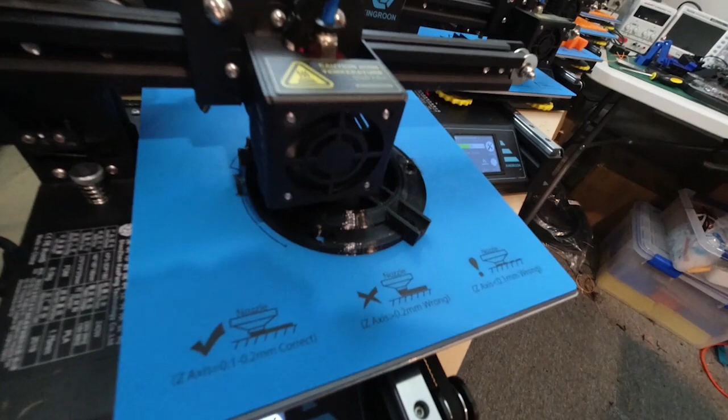Welcome to part 2 of how to start 3D printing. In part 1, we gave an introduction for people unfamiliar with 3D printing and how it works. We also covered the software side: how to download free CAD software, design a simple part, download slicer software like Cura, and generate a G-code file for the printer.

Today we're going to take that file and actually print the part we created. Then we'll look at some different printers out there and current prices, because another goal of this video is to show you that for less than $300 you can buy everything you need to get started with 3D printing.

The printers we'll be looking at range from $150 to $200, and filament runs about $15 to $20 a roll. You can pick a color. You'd be starting out with PLA. So once you've got your printer and filament, you're pretty much ready to go. Just download the software and figure out how to use it. There are a lot of tutorials on YouTube that'll help you with that.

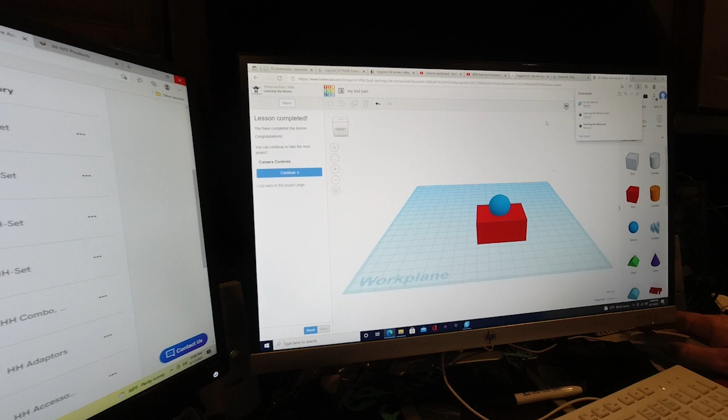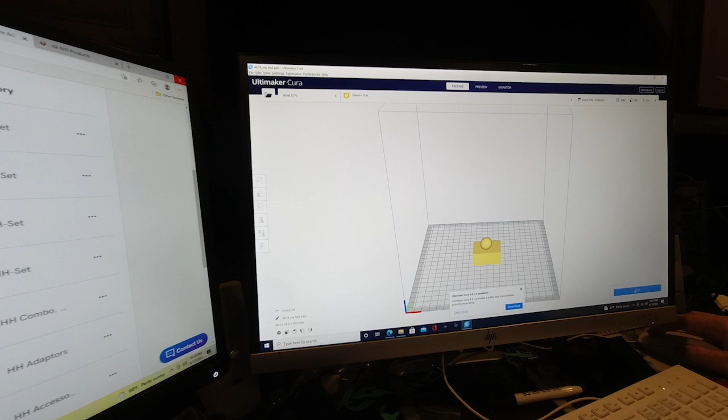So let's get going. To recap, in part 1 we created a square block with a round ball sitting on top of it. This was done by downloading a product called Tinkercad and using it to create a 3D drawing. Then we saved that drawing on our computer. Next, we loaded a software product called Cura, which sliced our 3D file and generated a G-code file that the printer will use to print the part.

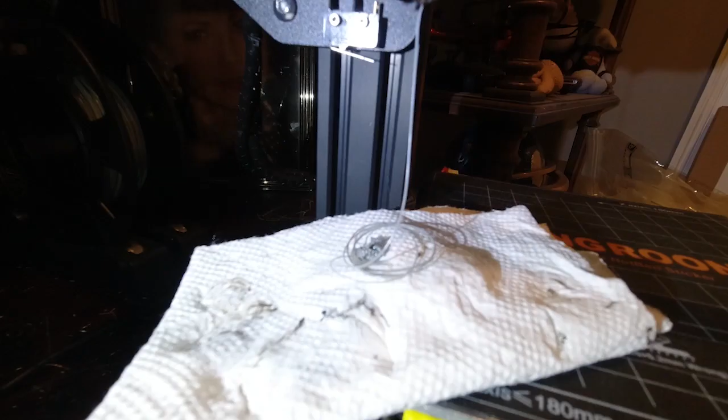We took the G-code file, copied it to a micro SD card, and plugged that into our printer. Now we're ready to start printing. We're loading some gray filament and running a bit through the extruder to clean out some old black filament we were running before. Now let's go ahead and start printing.

As you can see, it's printing a band around the bottom of our part. This is called brim, and it's printing because we didn't change the default settings on our slicer, which was set up for that. Now the printer is starting to print the actual part we created, the square with the round ball on top. So we're going to sit back and watch this thing print.

Now if you notice, our round ball is white instead of gray. This is because we paused the printer between printing the block and the ball and changed our filament to white. This is a little thing you can do.

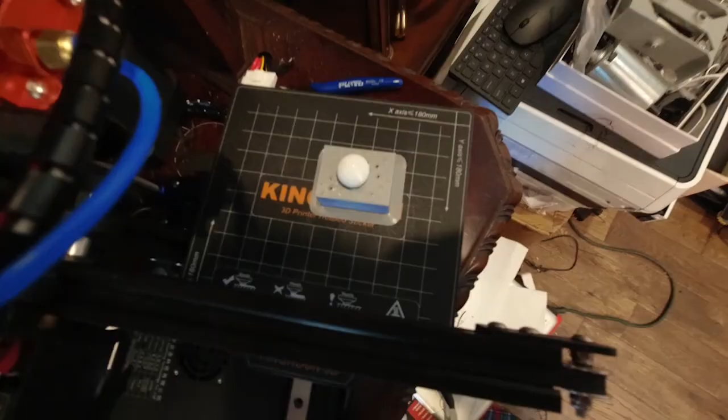As you can see, this is located kind of off-center on this build plate. That's because it thinks it's an ET4, and the build plate would be much larger here. This would be the center of that, but no big problem. So we take the part off and take a look at it.

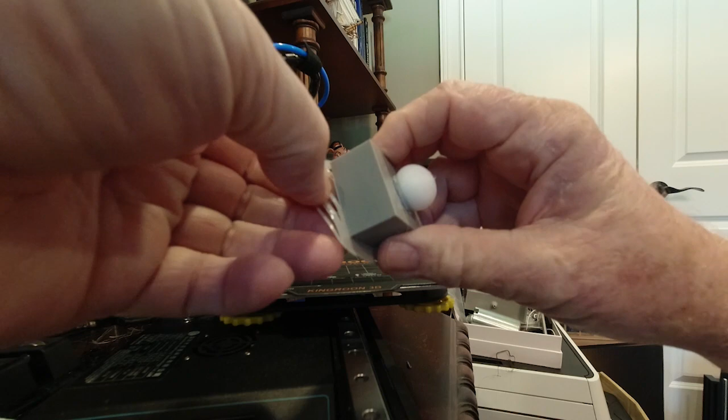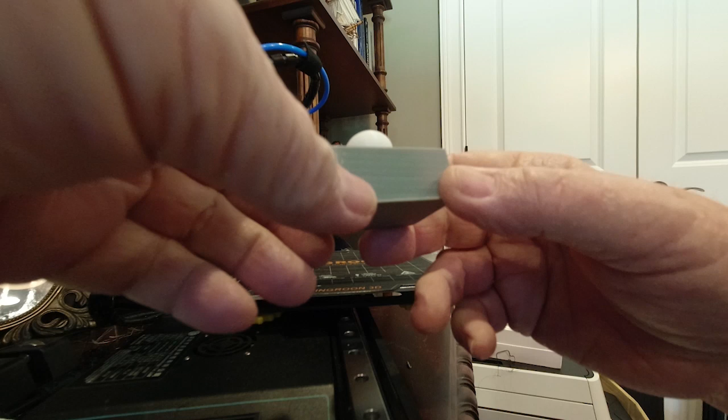We have some brim around here, and this stuff just pretty much peels off. Then you have your block. There's some distortion on the top. This is because, without going in and setting things exactly, I had a small infill with large openings at the top. I'd also been printing PETG with this printer, and I believe the nozzle has some buildup causing the filament stream to be thinner than normal, so it didn't fully fill in these little holes. But basically it made the part we designed in Tinkercad.

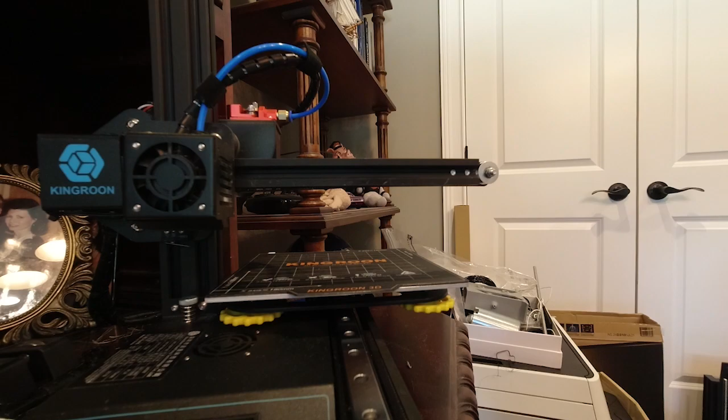Okay, let's check out eBay for some printers. 3D printers — we're going to sort by price plus shipping, lowest first, new printers, and buy-it-now price.

So let's take a look here. It looks like we have some under $100. These are simple little printers — I don't care too much for them. You know, they market them for kids, but I don't know that they're any safer than any other printer for kids, because they still extrude hot filament.

Now, here's something that caught my eye. If you think you're going to do some resin printing, this is a real good price on these Anycubic resin printers, the Photon Zero — for $109, that's not a bad deal. Here's the Creality Ender 3 printer for $143.99, free shipping. Let's take a little closer look at it.

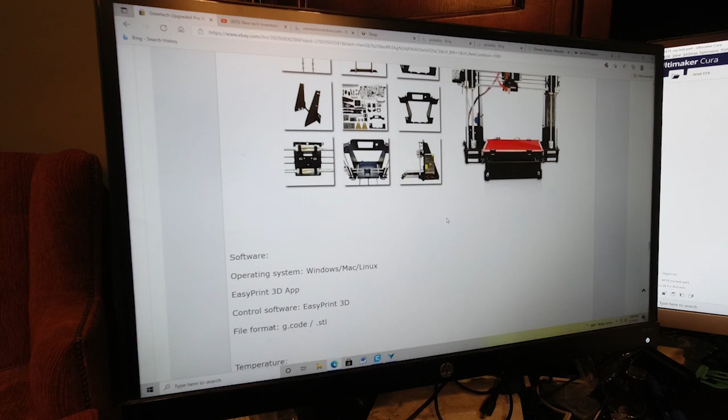Here we go, Anet ET4X printer. A printer I know quite a bit about, I've got several of these. $157, let's look at it a little closer. If you look at this one, you see there are very few parts to it compared to the acrylic printers, but still the ET4X has several pieces that have to be assembled. The ET4 and the ET4 Pro come with almost everything pre-assembled, 95% assembled. This one I would consider about 80 to 85% assembled, but it is metal frame.

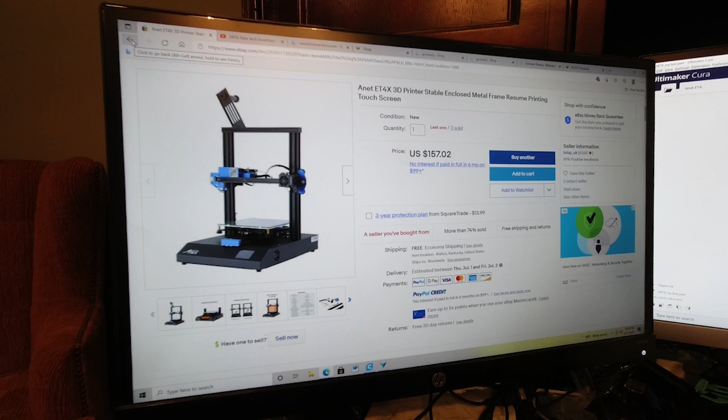It's a good printer. You can watch a lot of videos that I have where I've been running these things. Got a bunch of them down at the new print farm. And $157. Now we've got the Kingroon

KP3S. This is similar to the Kingroon printers that I've been using, and it comes pretty much assembled. Yeah, this is basically how it comes. You just put this piece on, hook up the power supply, a few easy steps, and it's ready to go. So very easy installation on the Kingroon.

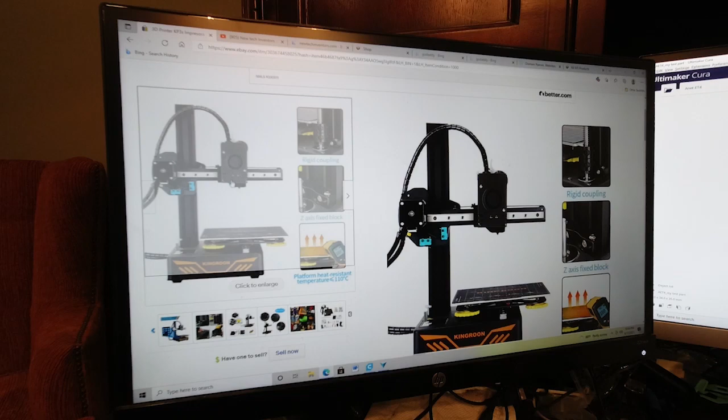It is a smaller printer. It prints 180 by 180 instead of the standard 220 by 220. But 180 by 180 works well for me on a lot of things, especially prototyping. Takes up a very small space, as you can see.

For $168, KP3S, I haven't purchased one of these yet, so I don't know exactly what improvements they've made. The regular KP3S had resume print, filament out sensor, 24-volt power supply, heated bed, can handle ABS, just about anything, removable magnetic build sheet that's easy for removing parts and everything. So it's a good printer.

Here we go, here's our Monoprice Mini Delta. I believe I did a video that included this, or maybe a couple of them. But the Monoprice Mini Delta, if you want a Delta printer, they print fast. They are the simplest things. This thing comes out of the box and you're printing in 10 minutes. You basically just plug it up and go. It's all ready to go.

It's real easy to print. You don't have to level the bed, you don't have to do anything. It does everything automatically. I love these Delta printers. I love to watch them print. They're like little inverted spiders in there, just working like crazy, building a web. So $180, that's a fair price for the Mini Deltas.

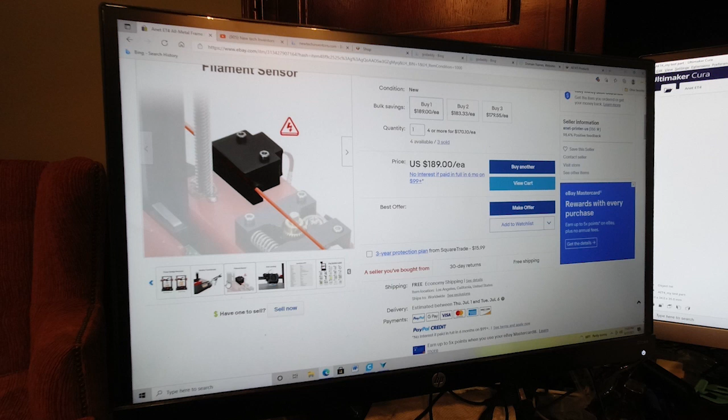Is if you go to the installation, all that you have to do is, this upright is already assembled, your motors are all intact, you put it together, very simple, with about 4 screws, then you come up and you put the drive belt on. You can assemble this printer in about 15 minutes. It's very fast. I think I assembled some of them on some videos because we have several of them down at the print farm. Anyway, it's a 220 by 220.

Okay, here we come to another Anet printer, the Anet A8 Plus for $199, $200. It's a 300 by 300 by 350 millimeters. So this is a larger, much larger build area on this printer, as you can see. I will say one thing about it, the assembly on this thing is like some of the others.

You have to do a lot of assembly. This takes a few hours for somebody that knows what they're doing. You pretty much assemble it from scratch. Once you're finished, for the price, you have a pretty good quality printer printing a large format, 300 by 300 millimeters.

The Anet A8 Plus for $200. Here's the Tronxy XY-2 Pro. I have these at the print farm also. This is a 255 by 255 build plate, so it's larger than your standard printers like the Anet ET4s and the Creality Ender 3s and so forth. So for $200, can't go wrong there. You can see a lot of those running at my print farm also.

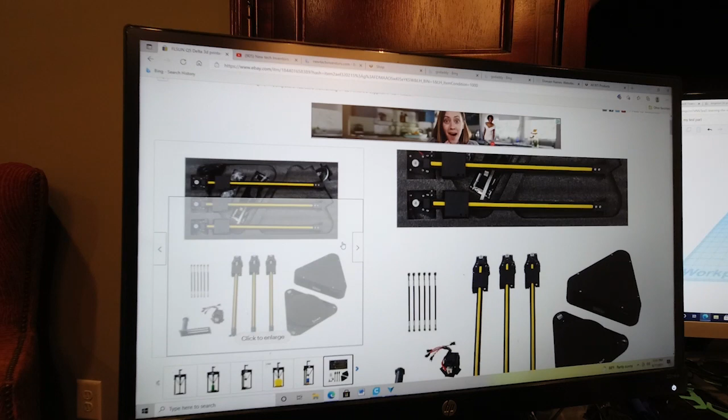The assembly, there is a little bit of assembly involved with this, but very little. Just attaching the arms, top and bottom plate, and that's about it. So it's a very simple and quick assembly. And if you go down and look at the specs on it, it pretty much does automatic leveling. It's a 200 millimeter circular build plate and 200 millimeters tall.

So it's a pretty good size for a Delta printer. And again, this is basically the assembly. You take the base, put these 3 posts on it, put the top on, and add these arms. And then you're in business. Put your filament holder up here on top.

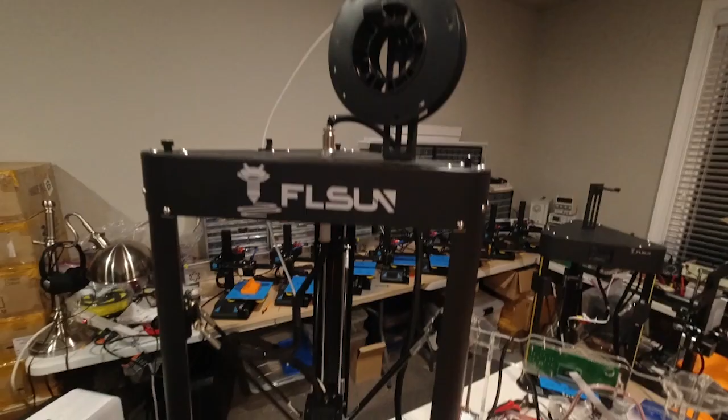Like I said, these things are really neat to watch. I don't know if I have any raw video of them or not. I may have to go upstairs and print something on one of them and videotape it so you can see how they operate. Here we have the FLSun Delta printer, and we're currently loading the filament.

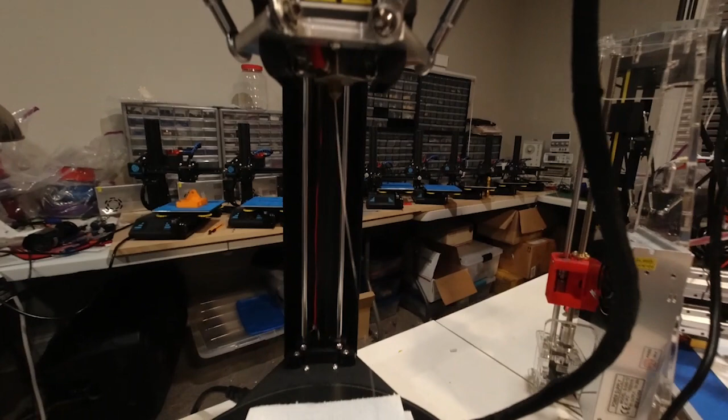Last time we printed some orange, so we're getting that orange out of there and running some white. So just let it run a minute here and clean out that nozzle, and then we'll be ready to print.

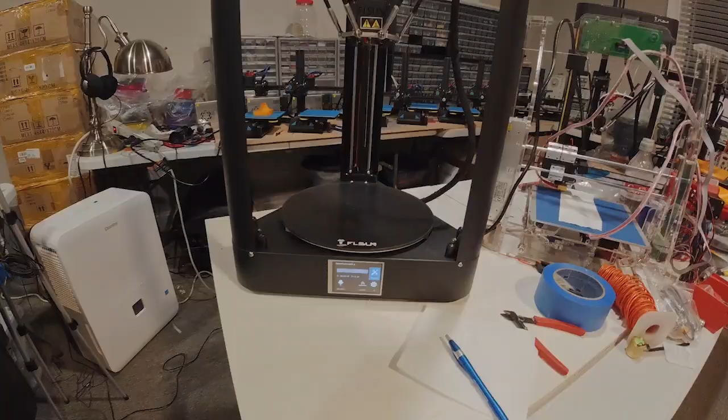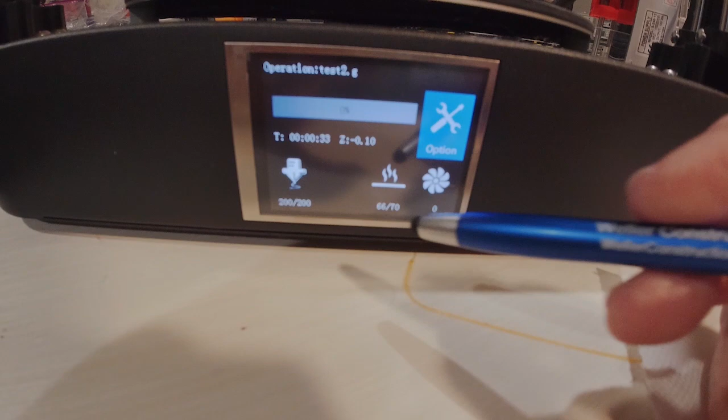Okay, we're about ready to start our printing here. We're preheating our bed, and everything's just about preheated. As soon as it gets preheated, we'll see what this, show you how this Delta printer works.

One thing that's very important to me is that you don't get discouraged if you're starting and wanting to get into 3D printing. Go ahead and take the effort. It's not that hard to do. I think you'll find it very rewarding. I have. And if you need any help, leave a comment, ask questions.